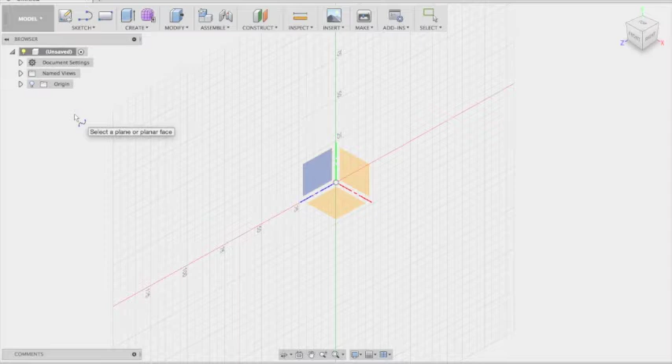After selecting Spline, I need to select which plane I'm going to draw on. It really doesn't matter which plane you choose to create on. I always choose the top plane for consistency. Once you choose the plane, the sketch edit page shows, allowing you to start drawing your sketch.

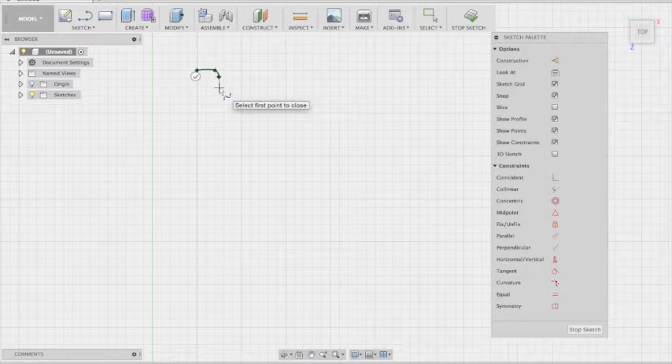I like to zoom in before starting the sketch. Then I start clicking where I want to make my points for the drawing. When I'm done drawing, I get down and click Stop Sketch.

Then I zoom in with the scroll wheel on the mouse. The drawing goes off the screen from where you can see it, so you have to click on the hand icon at the bottom of the screen that says Pan. It's like a grab tool, so you can grab the page by clicking and holding the mouse while you drag the page towards you. That brings the sketch into view so you can continue editing.

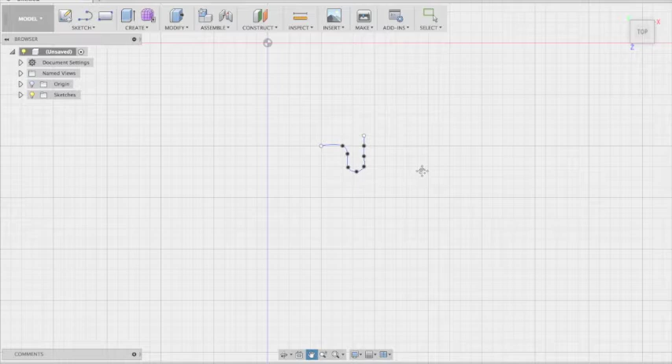Here I zoom in closer with the scroll wheel and grab it to move it again so it's easier to see. Now I need to choose the Select tool so I can micro edit the lines that I drew. I click on the Select tab box at the upper right. Now I can grab the points and adjust them to a more exact shape.

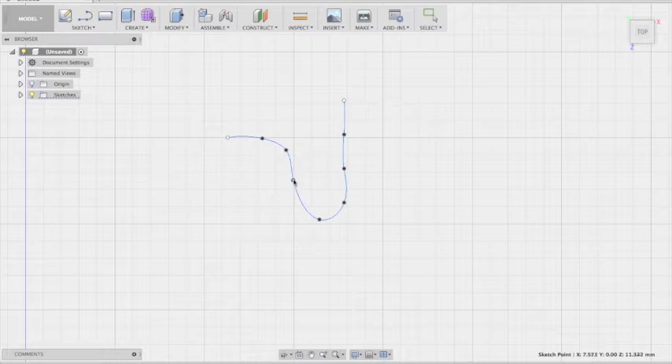I should mention this video is just a reenactment of the steps I took to make this design. So the design you're looking at here is not my final design, but it shows you the steps I went through to make it.

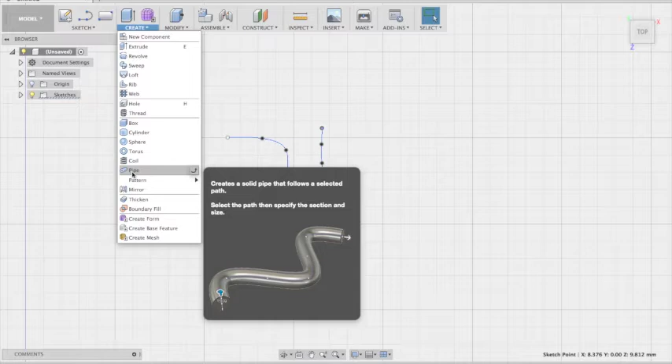Once you get the design where you're happy with it, you're going to go up to the Create box and scroll down to Pipe and click on that. Before you click on the line to create the pipe, over in the box on the right, you want to make sure you have Circular selected for the Section tab and the Hollow box checked. Now when you click on the sketch line, it's going to turn into a pipe.

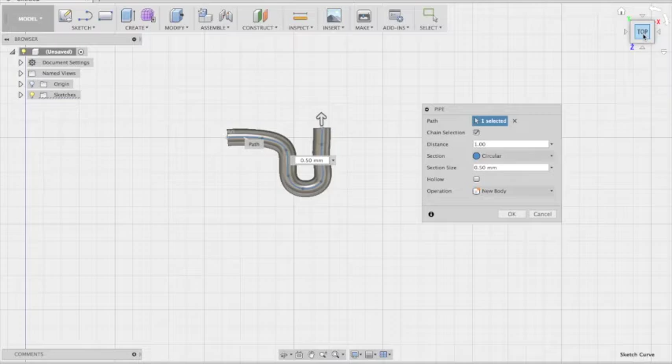I'll show a different angle so you can see what happens when you untick the hollow box. If I untick the hollow box, then the pipe turns to a solid core. Ticking the hollow box puts a hole through the pipe.

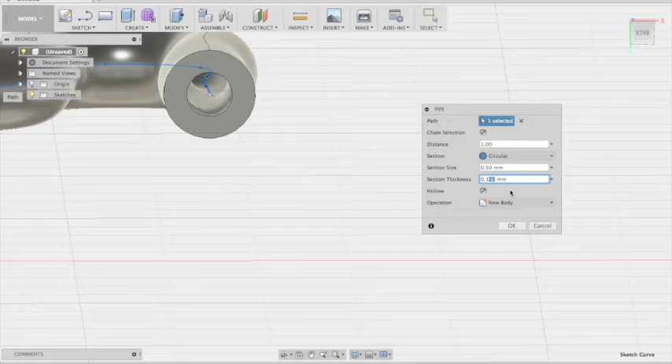Changing the section thickness will change the size of the hole. Changing the number to a bigger number will make the inner walls thicker, making the hole smaller. Making the number smaller makes the thickness less and the hole bigger.

So at this point I have the pipe with the hole through it bent to the shape I needed, but it's not at the size I need it to be. In order for it to be close to the size I need to know at least one of the dimensions of the arm on the real candelabra.

For this measurement I used a digital caliper, and I set the measurement to millimeters instead of inches because the 3D printer software uses the metric system. The outside diameter measured close to 16 millimeters. That will be the number I use to scale my part.

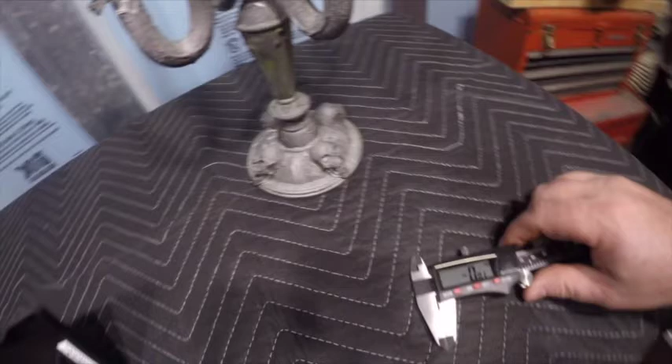So now that I know the outside diameter, I can apply that number to my 3D model and scale everything accordingly. To figure out what the diameter is, go to the Inspect tab and then click on Measure. Then go to the outside diameter and click on it when the outer ring highlights. Now you can see the outer diameter is only 0.50 millimeters.

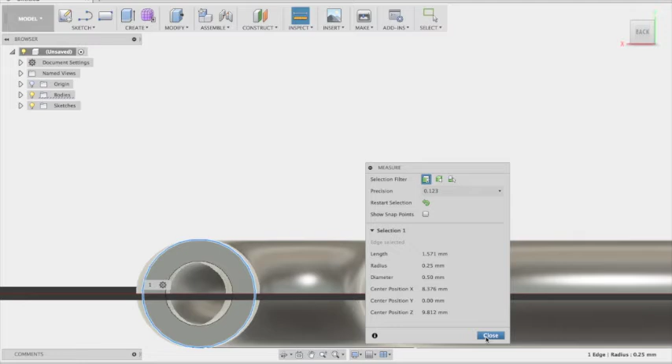This needs to be scaled up to 16 millimeters, so close this box and go to the Modify tab and scroll down to Scale.

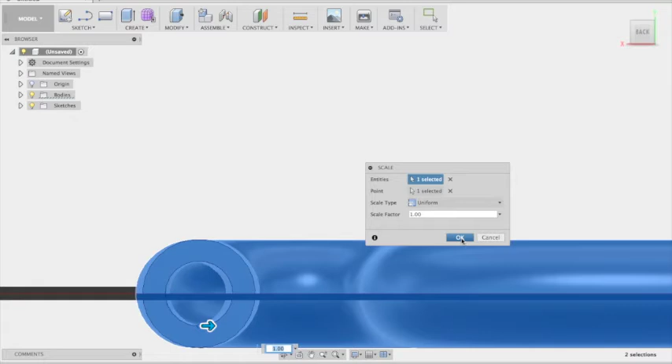Now click on the part to highlight it. Once selected, you'll see Scale Type, which should be uniform, and Scale Factor is going to be the number to change to make the part bigger. The bigger the number, the bigger the scaling size.

This step is time consuming because I don't know how to calculate the number, so I have to keep changing the value and then do the measurement until I get it right. Please remember, this tutorial is to show how I got the result, not how proficient I am at Fusion 360.

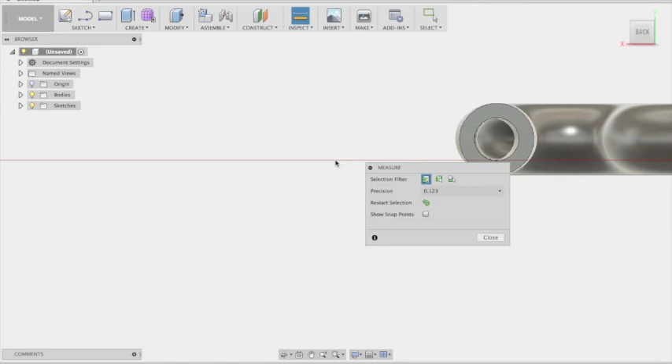My first attempt scaled it to 25mm, which is too big. My second attempt was 15mm, third attempt 16.5, and the fourth was finally the 16mm I needed it scaled to.

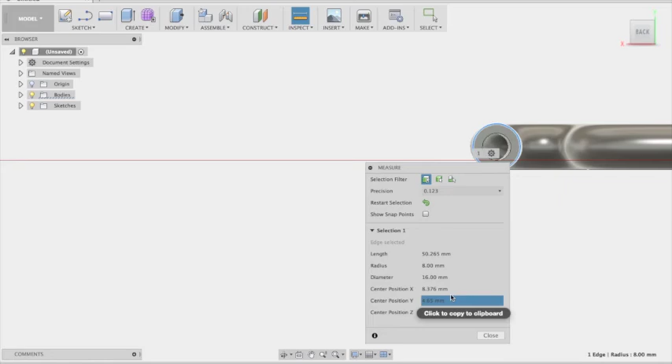So now the part is designed and needs to be saved as an STL file. So click the Select tab, then highlight the part. Then go to Body and right click, scroll down to Save as STL. Click OK.

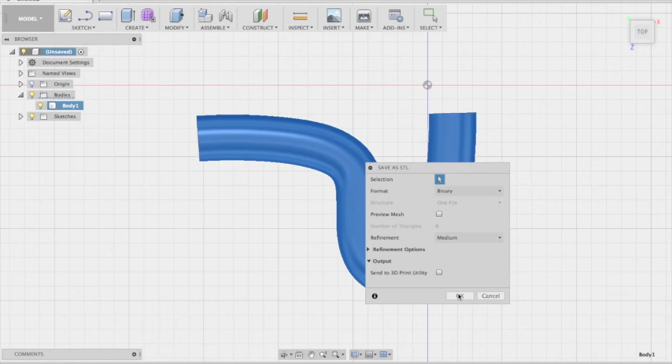I'm going to change the name from Body to Demo Candle since this is just a demo for the video. I want to change the location to desktop so it's easy to find. Hit save and that's it. I now have an STL file I can drag into the 3D software, convert to G-code and print.